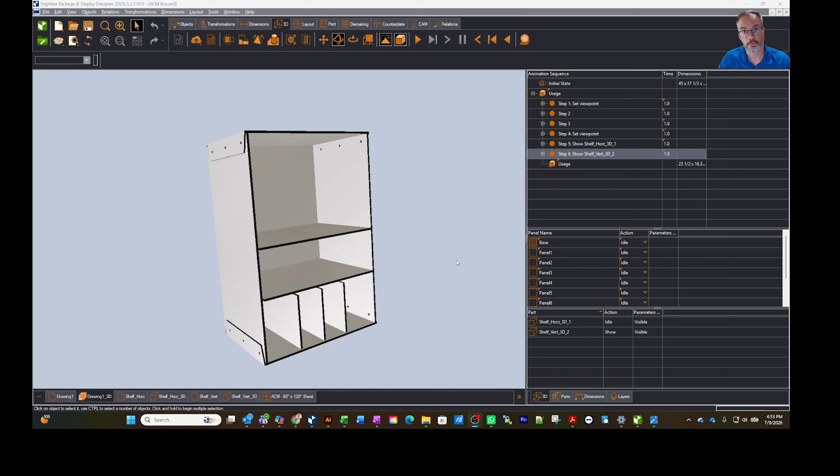Hello. In my previous life, I used to sell thousands of CNC machines, and I sold a number of them into the ACM market. Well, I've been in EngView for about 3.5 years, and I haven't really been thinking about ACM, but we have some pretty super powerful tools that lend themselves well to ACM.

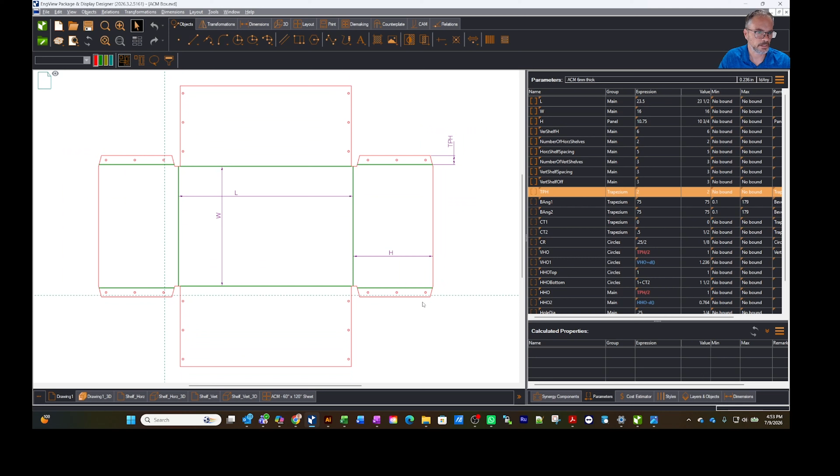So you can kind of see this box I got up on the screen here. Let's just kind of unfold it real quick and fold it back together. This was all made with custom components, but it's 100% parametric. So I can come in here and I can adjust the length, the width, the height. I can even adjust my flap lengths and these kind of things, and notice all my holes adjust on the fly with them. And you can also nest up all the parts, so you can get a nice nest and ready to cut. Let's just start and do a quick project real quick.

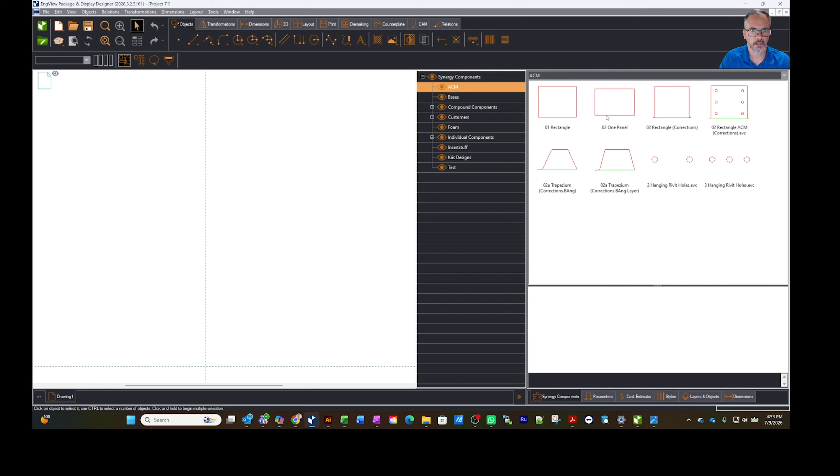I added some different thicknesses here, so I got 3, 4, and 6 millimeter ACM. Let's just go and use some parametric components instead of regular CAD components. I started a little library to make life easy, so I'll drag the single panel in and we'll say okay. And now what we'll do is we'll kind of just start to work our way around the outside. So let's just bring this rectangle in. We'll snap it into place and just work our way around here.

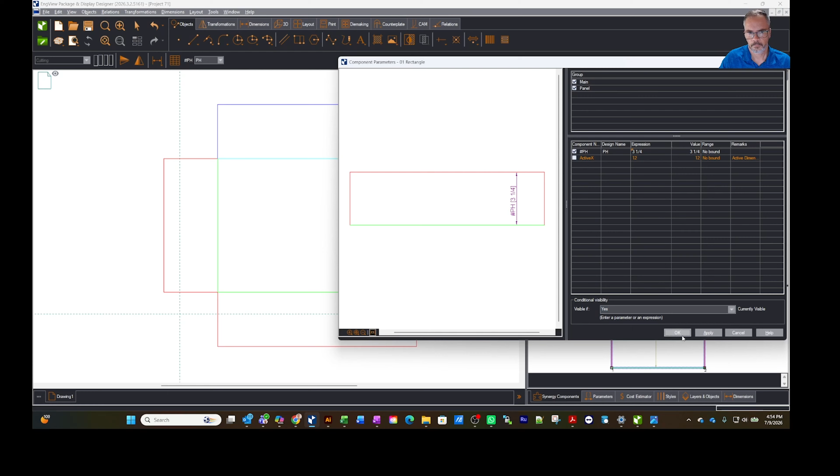All right, so now with our parameters, you can see we can adjust our length and our width. We could rename those. There's our height. So let's say you wanted this to now be like 14 by 10 by maybe 8 inches tall. Now you'll see, boom, our drawing is all scaled.

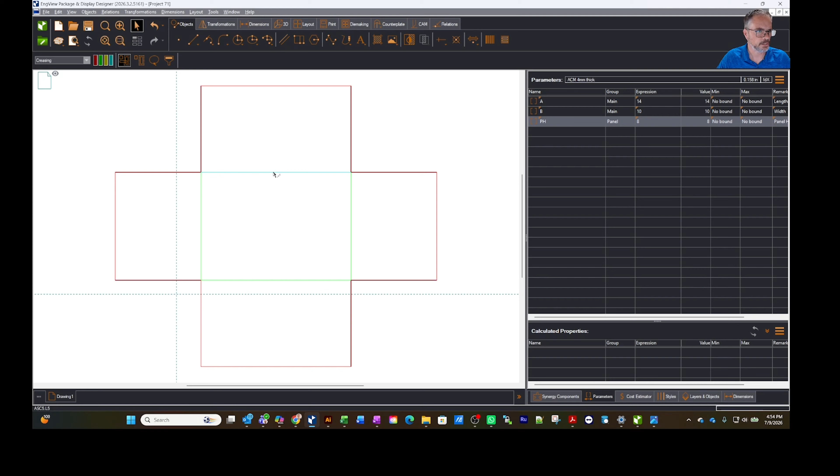Now, before we create our 3D, let's bevel these sides right here. So we'll grab them, we'll put a bevel cut on them, and we can actually create different degrees of bevel, but we're going to put a 45 bevel on these. So we'll grab right here and say bevel cut. Then we'll come back and let's grab these. Instead of creasing them, we're going to V-cut them. So now we'll grab this and we'll pick V-cut.

And now you'll see in our styles, if we remove all these unused styles, we've got a nice V-cut there. We've got a bevel cut there, and we got our regular cutting on the outside. And it looks like I missed one, which is nice for troubleshooting. So let's grab that guy real quick here, and we're going to bevel cut that also.

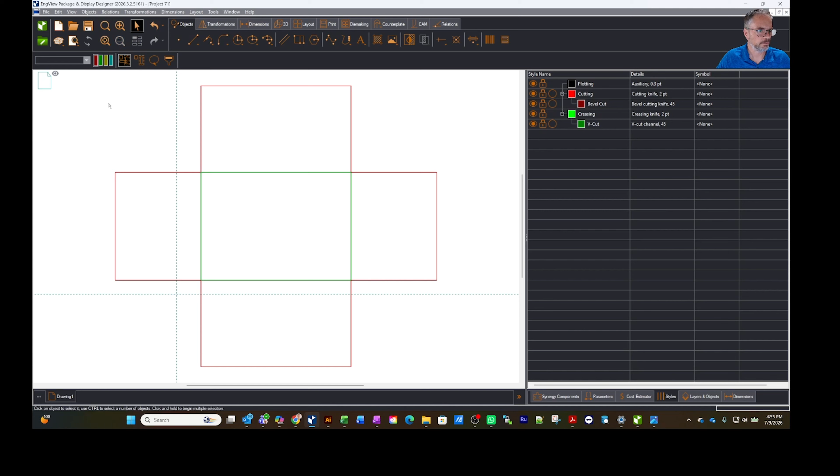Now let's create our 3D. So we'll grab our 3D. We'll generate a 3D. It's just going to fold everything to 90 degrees for us. So you'll see right here. Let's play it into motion. Everything folds up, and you get that nice design. You get nice crisp corners on there. We can actually take a look at it in a solid wire view to see the corner.

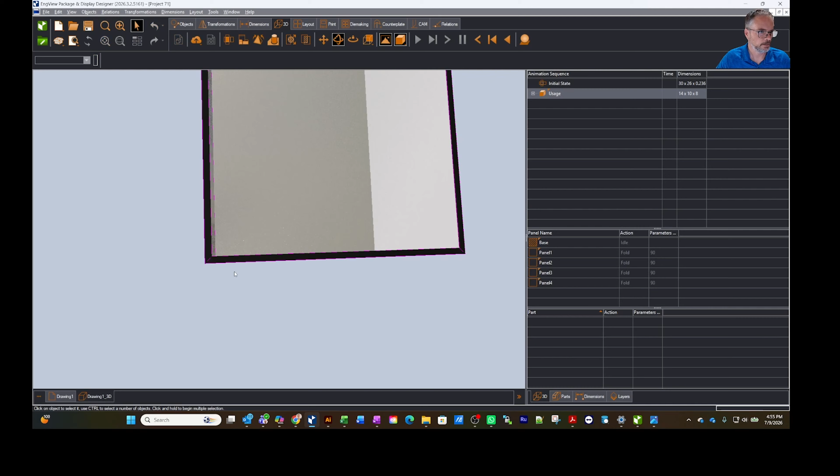But the other cool thing is we can come back here, and now we can change the material thickness at any time. Let's take that to 6 millimeter, say okay, come back to our 3D. Now you get a thicker view on it, and if you come back here and do the same thing, everything's going to adjust. EngView Smart with its parametrics. So we're going to drop that into here, and now look at there, you get a nice thinner view.